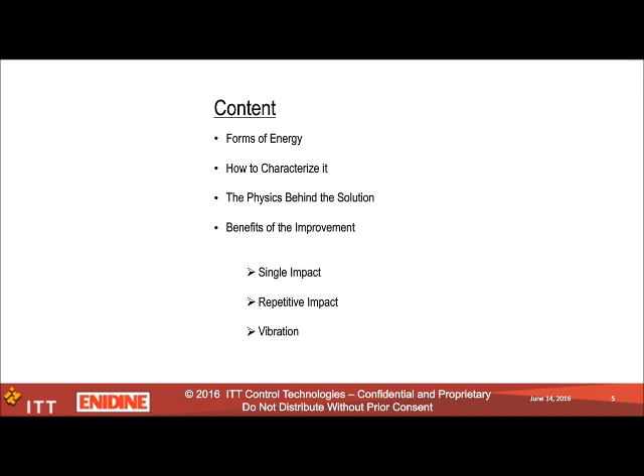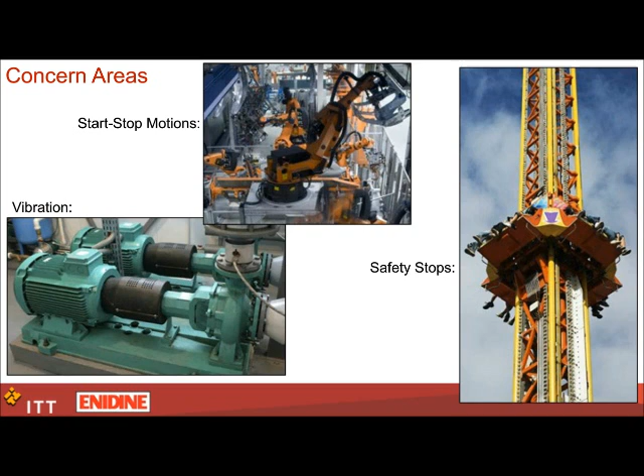So let's start with the shock events that are from stopping. I mentioned we'll get to the vibration later in the presentation. So focusing on the start-stop motions, for the shock or the impact examples, the type of damage we're preventing is due to the rapid deceleration of a moving mass.

So in the case of the automotive robot, this is when the motion is picking the panel and moving it to the next spot on the assembly line. It's that starting and stopping that we're focusing on. So of course, the goal is to move the panel as quickly as possible to increase production speeds, but the panel could become damaged or the equipment itself could suffer if it's moved too quickly.

On the amusement park ride, it's that emergency impact that we're looking at. So in the case of equipment failure, we need to manage the impact energy from a free fall event to protect the occupants.

So one extreme example of this is the impact from a car crash. So in this case, each vehicle is traveling with its own energy of motion. And when they collide, the energy has to go somewhere. And this is the kind of damaging energy that we focus on managing through, in this case, non-destructive means.

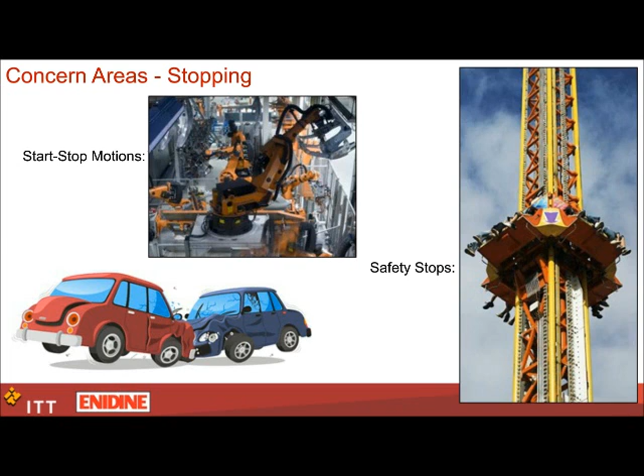So the first thing that we look at is breaking down the components of the impact itself. So in each of these cases, I have shown a linear impact, a rotational impact, and that free fall event. And you'll notice that in every case, we have a couple components that are common between the three: the mass, the impacting velocity, and then any external driving forces or torque that's applied. So this is the first step in identifying how much energy we're dealing with in this scenario.

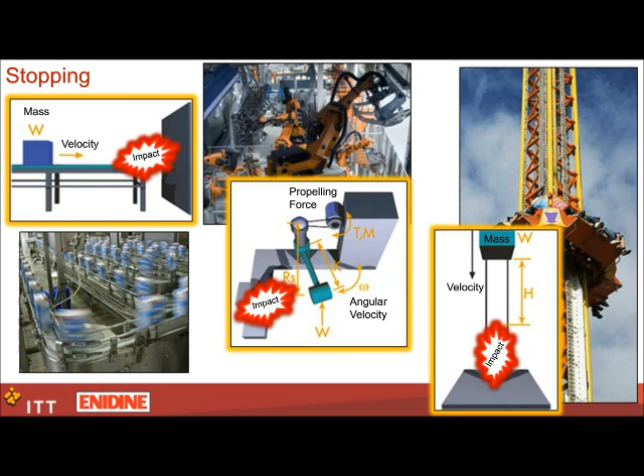Now, these parameters can be used to calculate the different forms of energy present in the impact. So starting with the linear impact on the left, we have both kinetic and work energy. The kinetic energy is from the mass traveling at its given velocity at the point of impact. The work energy is from external forces like the conveyor that's shown here, or it could be a pneumatic cylinder or something like this.

In the middle case, we also have kinetic energy and work energy that are playing into that impact. Except in this case, it's a rotational example. So this would be like the automotive robot. So at the point of impact, at the end of stroke, we're again looking at kinetic and work energy, but in this case, the kinetic is from the rotational inertia, and the work energy would be coming from a motor or something like this.

Then all the way on the right-hand side, we're again looking at kinetic and work energy that would contribute to the amount of energy at the point of impact. But we'll look at this in a different way. The suspended mass has a potential energy that's easier for us to calculate. And then it also has the work energy that in this case is due to the force of gravity that's pulling it down. This is obviously characteristic of the amusement park ride.

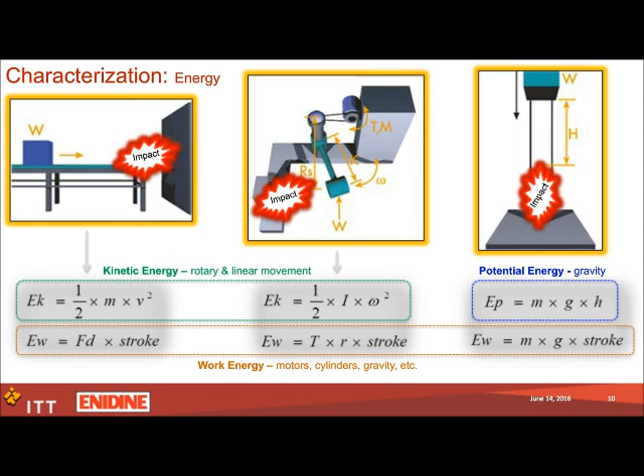So now that we fully understand the energy that we're dealing with from the impact, now the important part is to look at a solution to manage that. So the best example that I have to illustrate this is if you imagine someone tossing you a raw egg. Now, of course, if you just held your hands out firmly and didn't move them and just let the egg hit your hands, it's going to break and you're going to get egg all over the place. You wouldn't just hold your hands out like that.

So instinctively, what we're all going to do is kind of cradle that egg. And at the point that it contacts our hands, we'll move it back and down. So we begin to cradle that egg, and by doing this, our hands displace some distance while we catch it. And this is what I'm showing here as the dynamic deflection.

So I'm noticing on my slide that my equation's missing, but it's this dynamic deflection that's the one variable that we can change in this equation to calculate the output acceleration that the egg will see. So we're looking in this case at the impact velocity, dynamic deflection, and gravity. The impact velocity, it is what it is. The egg is traveling at some speed, and gravity is obviously constant.

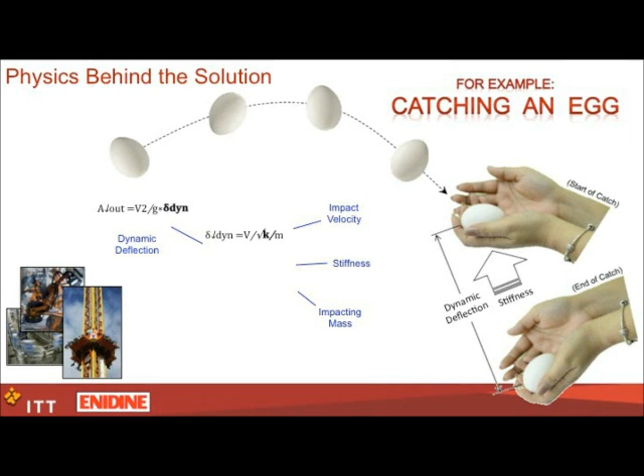Now, to illustrate this graphically, we can represent the person's hands with a steel coil spring. And then in this case, the egg would be like the falling mass that's shown. So in case one, we have a stiff spring with short travel. So this is like holding your hands out very firmly. On the graph to the right, this is represented by the blue curve. So the reaction force is built up over a short amount of time, and it's the area under that curve that actually represents how much energy there is with that impact.

So then when we look at case 2, it's a soft spring, but it has the same short travel. So on the graph, this is shown as a very much lower ramping up of the force. But at the end of that stroke, if we compare the amount of area under that curve to case 1, it's much, much lower. And this means there's a lot of energy still left over.

And you can imagine this is like holding your hands directly over a table when you're trying to catch the egg. As soft of a grip as you could possibly use, after a short amount of time your hands would hit the table and you'd get a spike in force. And that's what's being shown with this orange curve in case 2. The area under those curves still needs to be equal between each case.

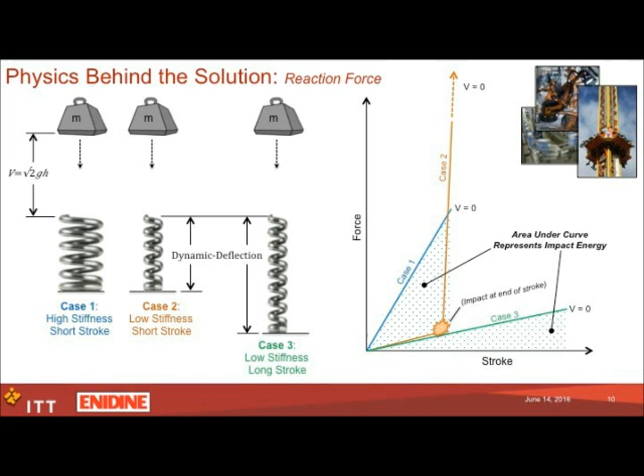Now, another real-world example that I'd like to show is in train end stops. So there's a couple different methods that are used, and they follow these 3 cases that I'm showing here. The first, of course, being the high stiffness and short stroke. This would be represented by a rubber bumper. So for the rubber bumper, it obviously has a short stroke and it's very stiff.

Case 2 would be represented by a short stroke hydraulic damper in conjunction with a friction brake. So in this case, the short stroke damper is very soft, like holding our hands over the table to catch the egg. But when it reaches the end of stroke, the remaining force then engages the friction brakes that are against the rail. Those take over with a higher stiffness, and not quite like I was showing in the previous slide, but in the graph to the right you can see that at the point of impact, case 2 in orange then begins to ramp up more, where the friction brake takes over.

And then finally, for the long stroke and low stiffness, this would be a long stroke hydraulic damper. And you can see in case 3 in green on the graph that it's a gradual deceleration of the train. And the resulting forces are much lower.

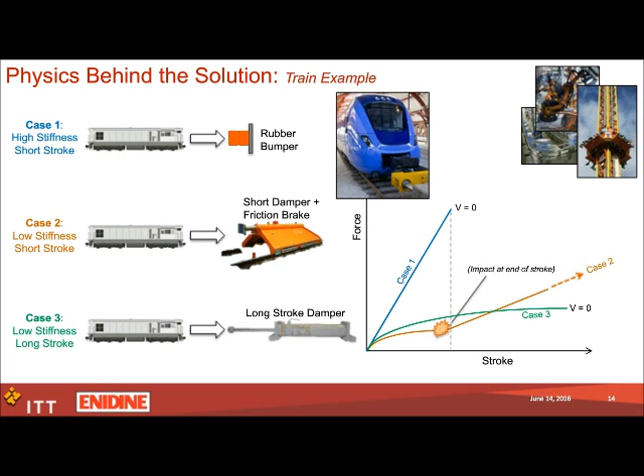So now that we've determined the physics behind reducing the impact forces, the next thing that we need to look at is, after impact, how much will it rebound? So controlling the rebound is done with damping. So let's take a look at the same mass from the previous slide, and now we're going to drop it on products with various amounts of damping.

So starting from the left, it's the same steel coil spring that we were looking at previously. A steel coil spring has very little damping. So when we have that mass suspended above it, we start with the potential energy from its drop height. Once the mass is released, that potential energy then changes into kinetic and work energy.

As soon as it impacts the coil spring, as it compresses the coil spring, it's converting that energy into potential, stored energy. And then once it's completely compressed, the spring will then rebound it back into the air as kinetic energy. And that's shown between the blue drop arrow and the red rebound. Upon rebound, the scenario here with very little damping will rebound very close to the height that it was dropped to. With very little damping and low friction on the system, there's not much energy loss in this system, and it will rebound right back up to close to where it started.

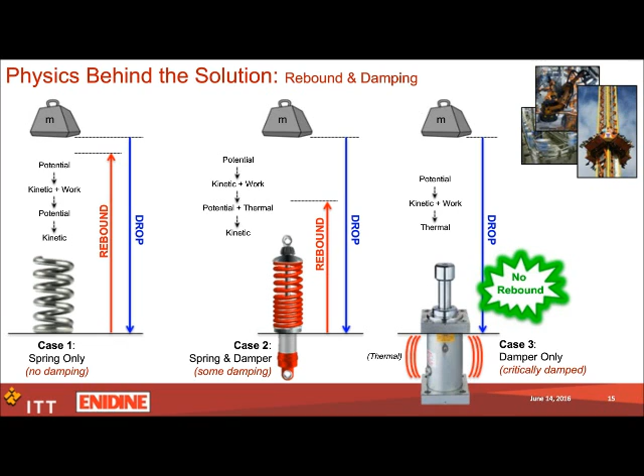So by smoothly decelerating this moving object with low forces and rebound, there are a couple benefits that I want to go through. So on one hand, the dynamic deflection reduced the forces on the equipment. This means more efficient structure design, less maintenance, less downtime, and higher productivity. During emergency impact conditions, it prevents damage and improves safety. This is particularly important for the amusement park ride example.

Now, the damping reduces the rebound of the object. And you can actually see this graphically with the three curves that I have here, pointing out the different amounts of damping. The pure sine wave there would be the coil spring. It just keeps bouncing up and down. The one in the middle is the middle with some damping, and you can see it degrades over time. And then finally, the critically damped hydraulic shock absorber comes to rest without any rebound.

So in the production world, this means increased production speeds because we're managing those decelerations. So we can move faster between cycles and then not have to wait for something to stop rebounding before moving to the next process. This means cycle time improvements and cycle time reductions and productivity improvements.

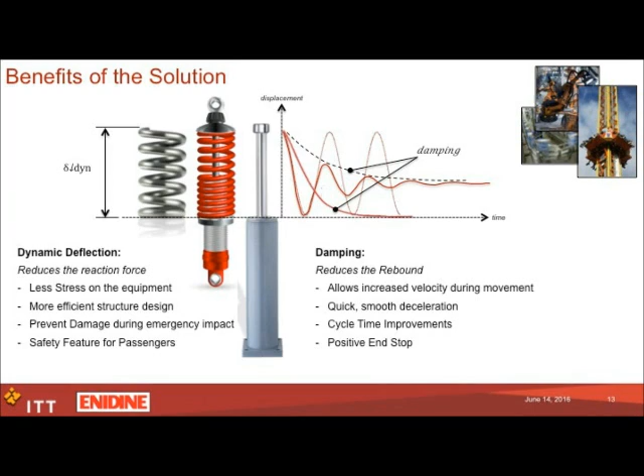Now, here are some product examples illustrating the different amounts of dynamic deflection and damping. So starting from the left, and I tried to cover everything here with the amount of deflection and the amount of damping. So with the same steel coil spring that we've been talking about, we have a long stroke, which gives us the low forces, but very little damping, so high rebound. This is the one we've been talking about. Next to it, though, is a Belleville washer. So this, again, is a spring with very little damping, but it has extremely short stroke. So the rebound will be high from the low amount of damping, and also the reaction forces are going to be high.

And as we move along, we have the automotive style damper, which has the longer stroke, but just some damping. So I have it as a medium rebound here. The rubber bumper, which is next to it, has some amount of damping inherently, but the stroke is much shorter. So this will have a medium rebound, but high reaction forces. Then we have the industrial shock absorber. And this was our last example on the train slide to decelerate the train. So because the stroke is long, there are low reaction forces, and the damping is high. So I put low rebound here, but it's actually, if properly sized, it's zero rebound.

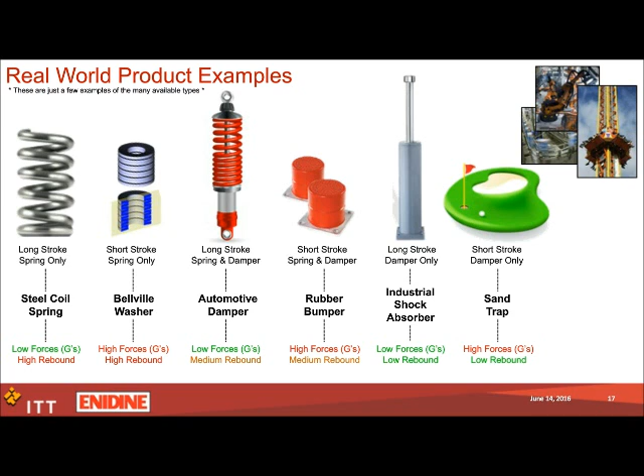Okay, so now I'd like to take a step back to our original example so that we can shift gears here. And let's focus now on the motor and pump example, which causes vibration, a different form of energy of motion.

So this vibration from the pump can be characterized in two different ways. On the top right, I have shown a scenario where the vibration is coming through the structure itself and causing damage to a piece of sensitive equipment that's mounted to that structure. In the other case, on the bottom right, the equipment itself is the source of the vibration, and this would be characteristic of the pump that I have shown. That pump, or the equipment that's vibrating, is causing damage to the surrounding structure, or it could be transferring through that structure to something else and causing damage there.

But this is anything that has a reciprocating piston or moving parts like that, imbalanced rotations, and then there are a variety of different types of transportation vibration inputs. And these are a bit more complex, but they're a random vibration input. So in any case, we still approach it the same way. The goal is to isolate the source of that vibration from the surrounding objects.

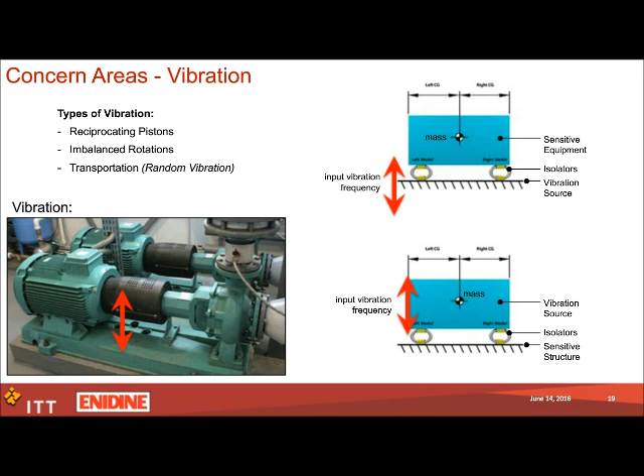So the first thing that we look at is to break down what the vibration itself looks like. And now this is the vibration source that we're focusing on here. This is done by understanding the frequency and amplitude of the vibration source. So in the photo that I have shown, the example, the yellow arrow is pointing out the source of the vibration as being the pole. And the piece of sensitive equipment is mounted to the right of it and connected through mounts to that vibrating pole. So it's this pole that has a frequency and amplitude to it. This is the first thing that we're identifying here.

Frequency is the number of times the vibration moves up and down each second. This is basically how fast the pole is moving. The amplitude is the amount that the pole itself is actually moving. So frequency is how fast, and amplitude is how much.

A simple example to illustrate frequency and amplitude is a comparison of a hummingbird to an eagle. The hummingbird's wings move at a high frequency because they're flapping very rapidly. The amplitude is low since they're not moving very much. In comparison, the eagle's wings move at a lower, slower frequency, but they move much more, giving them a larger amplitude. This is what we're trying to identify for the source itself, so that we can then move along to finding an appropriate solution for isolating it.

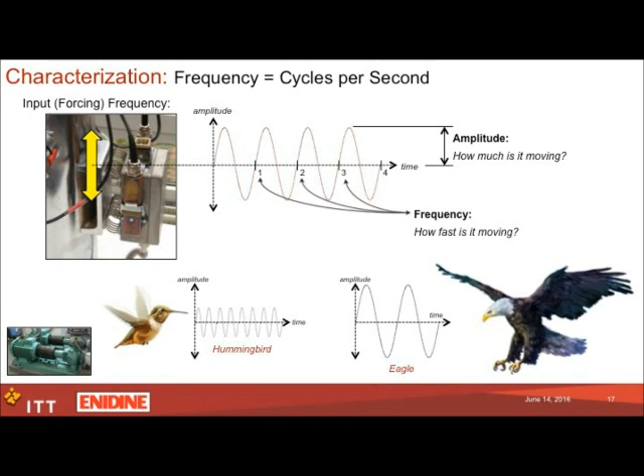So now that we understand what the input vibration looks like, we'll take a closer look at the connection between the structure and the equipment. For every connection or mounting point, there's a frequency at which it will resonate. And this is called the natural frequency or the resonant frequency.

So this is a bit tricky to imagine, but one example, and just as an example because it's difficult to relate to the mounts themselves, but if we think about having a mug of coffee, if you were to take that open mug of coffee and start vibrating it slowly back and forth, we all know that you can easily get a frequency, number of times you move it per second, that would not take very long to spill that coffee all over the place. So if we were to count the cycles per second that cause that coffee to really get moving and want to spill out of the cup, that's the natural frequency of that coffee. So a mount system has the same type of natural frequency.

If you look at the spring mass examples that I've shown here, for each one of these you can think about pulling that mass down and releasing it. So when you pull the mass down and release it, how many times per second is it bouncing freely on its own? This is its natural frequency. So this natural frequency is characterized by the stiffness of the mount and the weight that's being supported. So in the example in the picture on the left, the weight would be that sensitive piece of electronics that's shown there. And then the stiffness would be how stiff is that spring that's connecting it to the pole.

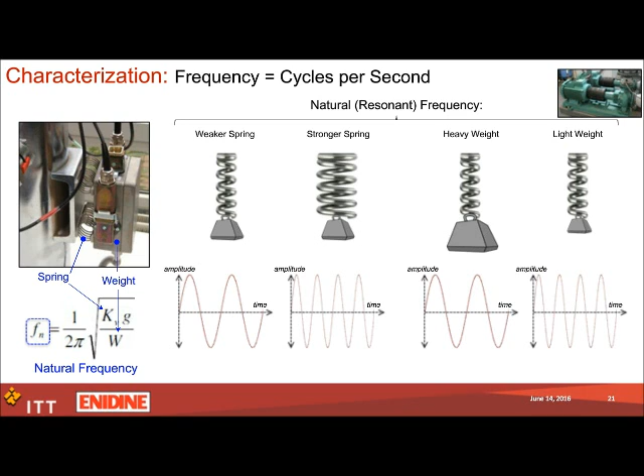So in order to determine how much vibration will be transmitted from the source to what we're trying to protect, the vibration input frequency from the source is compared to the natural frequency of the mount or the connection point. And the easiest way to think about this is to take the two previous slides, our input frequency and our resonant frequency. If you have the same input frequency and resonant frequency, that input will obviously cause the mount to resonate. It's like sloshing your coffee at exactly that point that causes it to spill.

So now if we think about the same coffee cup sitting in our car, when we're driving down the road, if you were to hit very, very small bumps all in a row, high frequency input, the coffee will jitter around, but it's not actually going to spill. You're not going to get those low frequency inputs that we know cause it to spill. So in that case, our input is much higher than the resonant frequency. And this is actually what we're targeting. So simply speaking, we're trying to avoid putting the resonant frequency of our mount system or our connection point in line with where our inputs are.

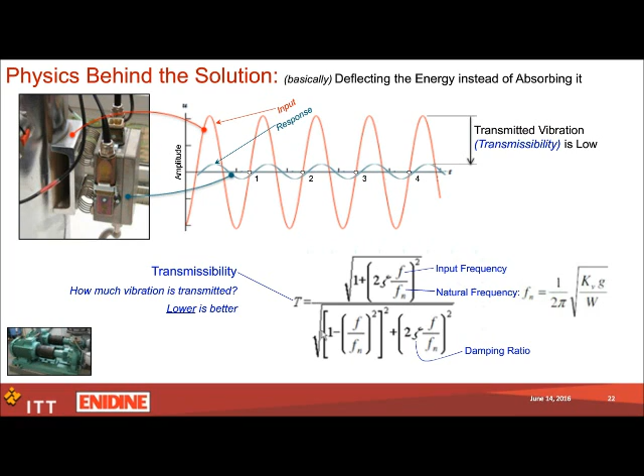So a vibrating system with good isolation is characterized mainly by that reduced movement to the equipment that we're trying to protect. This reduction in movement lowers the strain on the surrounding structure, equipment, and mounting points. So it eliminates damage to sensitive components, prevents broken welds, and damage to the structure. This can also be an ergonomic improvement for equipment operators or passengers that are coming into contact with the equipment that's vibrating. The reduction in movement can also prevent disruptions to electronics, GPS systems, and provide a steady platform for cameras, video, and sensors.

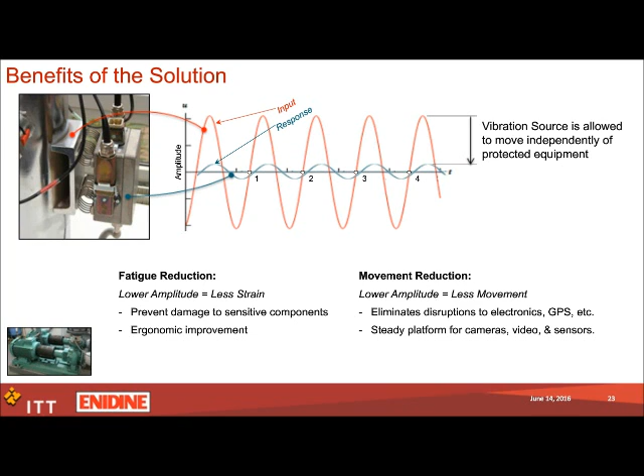These products are all unique in their own way, but what we're primarily looking at is the amount of weight that's being supported, which product is capable of supporting that, and then once that's decided, what stiffness do we need to keep that natural frequency far enough away from any of the input frequencies so that we get good isolation.